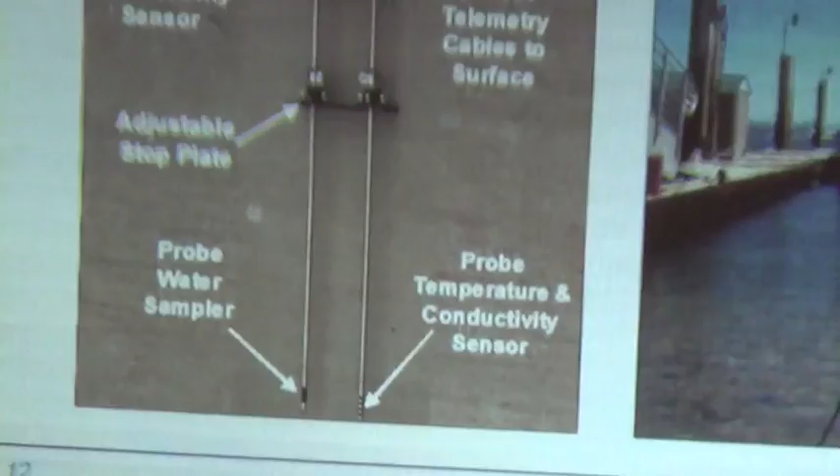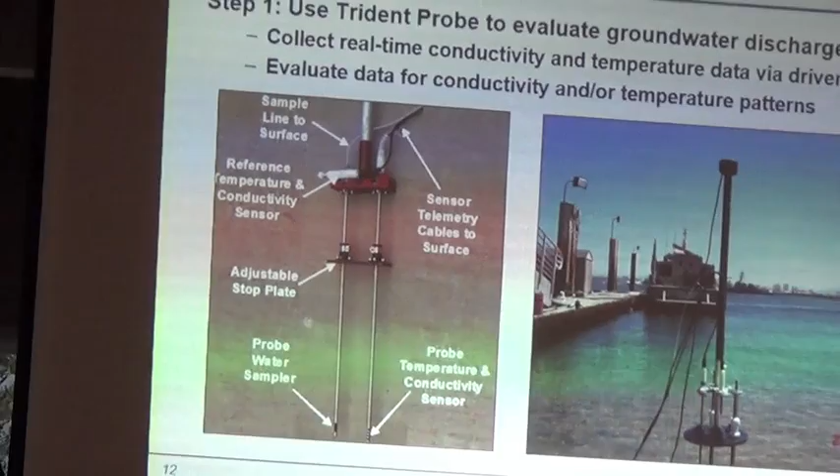So for the first phase of the investigation, we're going to be using what we've termed the Trident probe. On the left-hand side is a prototype version we developed back around 2005. The main idea is we're basically using metal rods to push down into the beach sediment to look for two things: temperature and electrical conductivity.

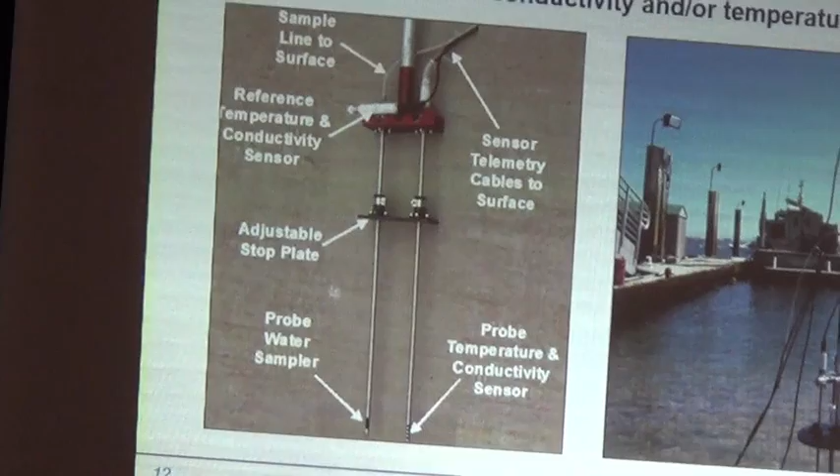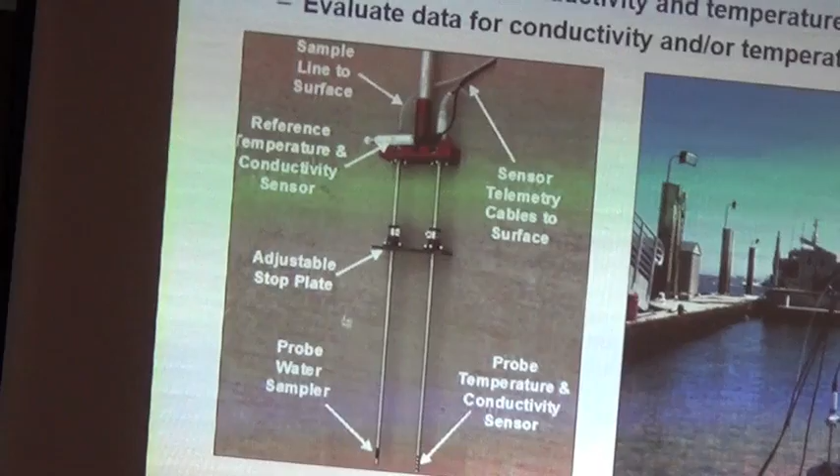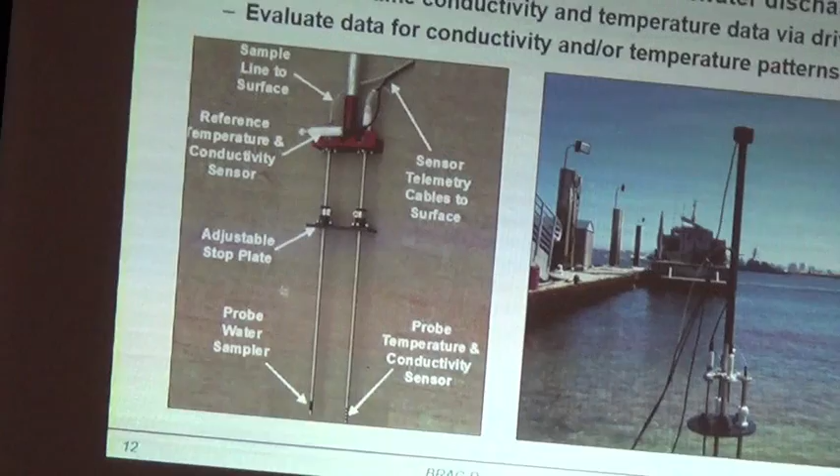As many of you probably know, bay water is salty, so it will conduct electricity, whereas rainwater, which becomes groundwater flowing out along the beach into the bay, is fresh water and doesn't conduct electricity. So we can use this conductivity probe to tell us the difference between bay water and fresh groundwater, essentially where the groundwater is emptying out from Yerba Buena Island through the beach into the bay.

So we want to get some idea about where there might be a potential source of petroleum being carried out by this groundwater. The conductivity probe gives us an idea where to look, and then in phase two, we actually collect that pore water for chemical analysis to look for that petroleum.

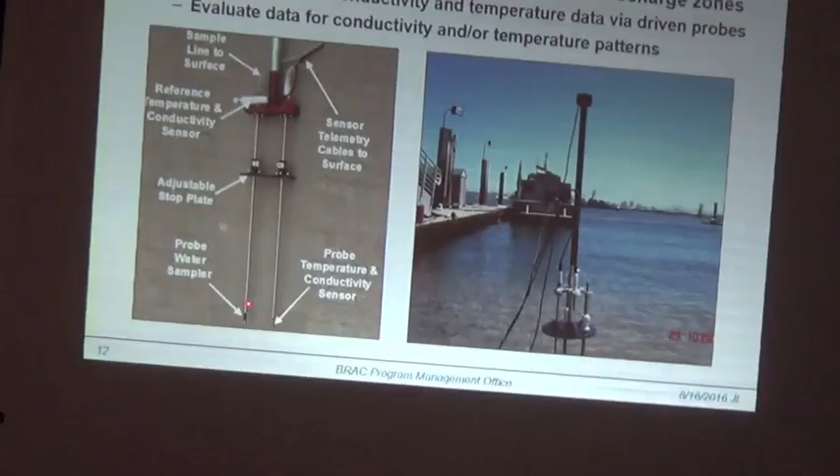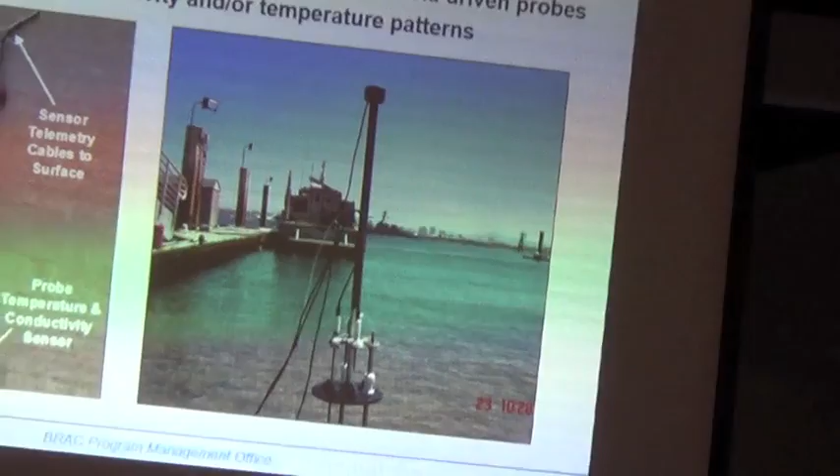The second probe here is actually a rod setup with a screen on the bottom that we push in, which can collect a sample of that water for chemical analysis. On the right-hand side is just a modern version. We've had several versions of the Trident probe, revised now so we have GPS for positioning on top, and communication back to the beach through wires to computers so we can collect the data.

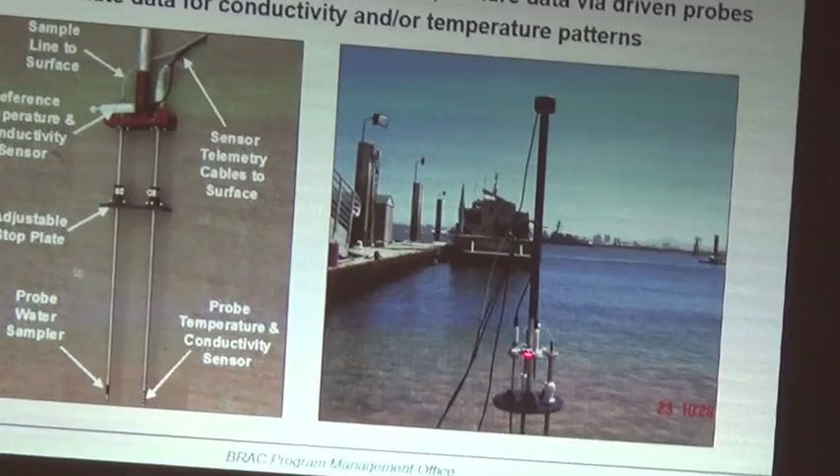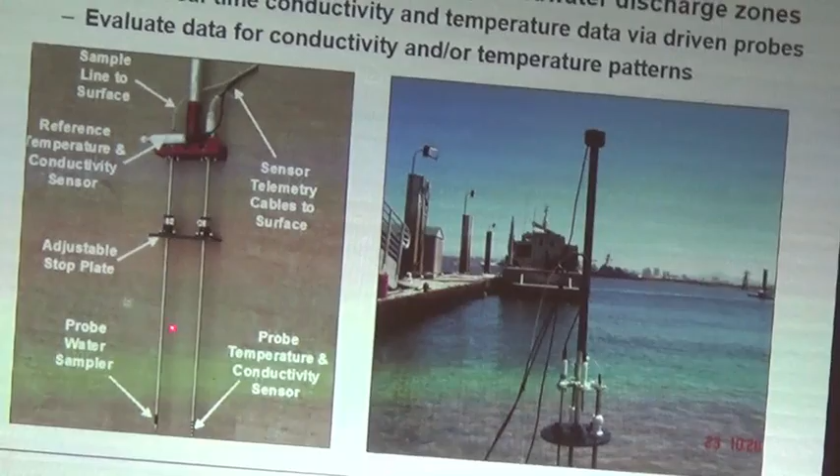In addition to just having two locations for probes, we now have the ability to include up to six locations. The benefit is that we can, in parallel, collect multiple groundwater probes at the same time.

So I sort of use this when my kids always say, well Dad, what do you do at work? And I try to say, well I go to the beach just like you guys, and I play in the mud, okay? But what we're really looking at with this Trident probe is how to collect chemical samples from the water in between those grains of sediment, as Mukesh was trying to give you an example of.

So my analogy is like this: the Trident probe is sort of like when you go to a fast food restaurant and order a milkshake, okay? Very fine-grained material like the slurry in the milkshake. If you put a straw in there, which a straw is basically one of these probes, it's very difficult to suck out a sample. In this particular case, working in the intertidal areas of the beach, it's more like when you order a Coke, where the grains are like the ice cubes, and the water in between is like the Coke.

It's very easy to put that sampling device, a straw, in and recover a sample. So the whole idea of the Trident is we've developed this tool so we get easy access, rapidly recovering a sample of that water, that pore water in between the grains. It's like drinking a Coke as opposed to trying to drink or suck out a milkshake.

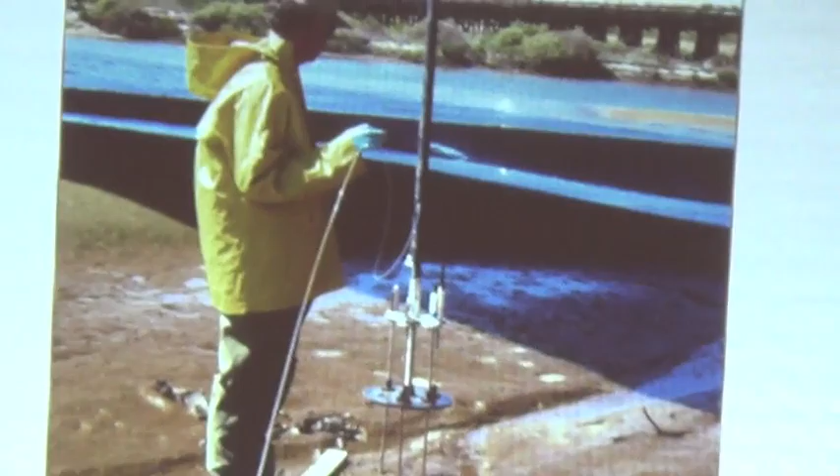Go to the next slide. The second step in phase one is the recovery of water from those zones we've determined to be fresh groundwater. This is a picture in an intertidal area where we're using the Trident, and we've removed all the electrical lines, leaving just the sampling line to the Trident to recover the pore water samples.

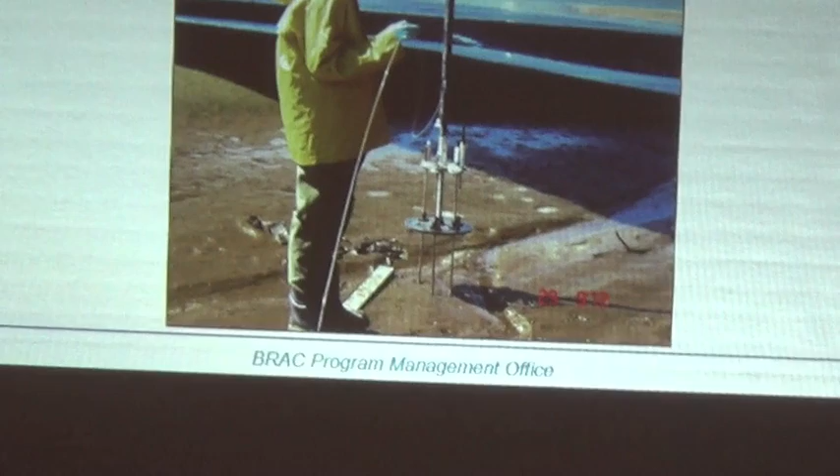So we hook that up to a pump and slowly suck out a sample from each location. As Mukesh showed you before in the map of the site, we're going to put a grid of samples centered around that storage tank location and work our way out. There were some elevated petroleum concentrations near that tank, but there weren't quite enough sample locations to allow the regulators and the Navy to agree on how big that contaminated zone is, how much of a problem it is. This will give us more locations to bound where that potential petroleum contamination is present.

So we collect those samples and send them to the lab to be evaluated for a number of contaminant analyses. In addition to just looking at the amount of petroleum present, we're also going to look at the types of petroleum products present to try to determine a fingerprint of that material. This helps give some idea about the weathering patterns and what the source of that petroleum might be.

So with that, I'm going to hand this back over to Katie to go through the second phase of the investigation.